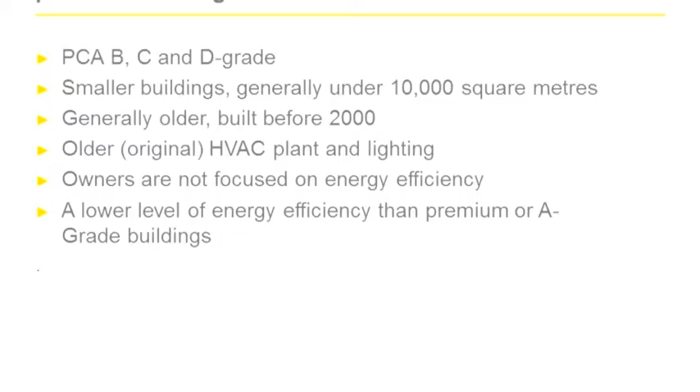So what did we find? We found that they were generally smaller in scale, older, often built before the year 2000, with older equipment forming part of their building fabric - older HVAC systems etc. - with limited capital spending to improve those over time.

We typically found tenants were less engaged in energy efficiency in those buildings. These small to medium-sized organisations' main imperative was renting a space in a good location close to where they carried out their business and that was cost effective. They weren't driven by the same key directives as we saw from the premium market, which was about demonstrating the positive characteristics you get from a higher star rated building.

But is it significant? This graph generally indicates, I think, that it is. Around 70% of the market in Australia is termed mid-tier, so the B through D grade properties. And when you have a marketplace where buildings contribute 23% of the greenhouse gas emissions of a country, 19% of which are coming from the commercial sector, that actually generates a reasonable opportunity for governments to intervene, and for people such as the GBCA and their partners here in New Zealand to see that as an opportunity to generate significant market change and efficiencies.

Clearly, as I said though, the greenhouse gas profile here is significantly different based on the electricity consumption market, but nonetheless important.

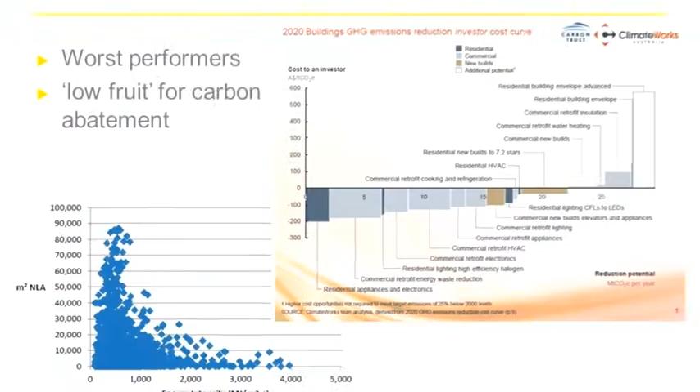So what is that opportunity, and is that real in relation to mid-tier? You might expect that the smaller end of the market are therefore smaller users of electricity - that isn't actually what we find. When you look at this graph on the left-hand side, as you go up the net lettable area space, smaller spaces tend to have higher energy intensity. That is to say, the market that isn't currently being penetrated by the NABERS rating schemes, by energy efficiency opportunities, or the Green Star rating tools tends to be the worst performer.

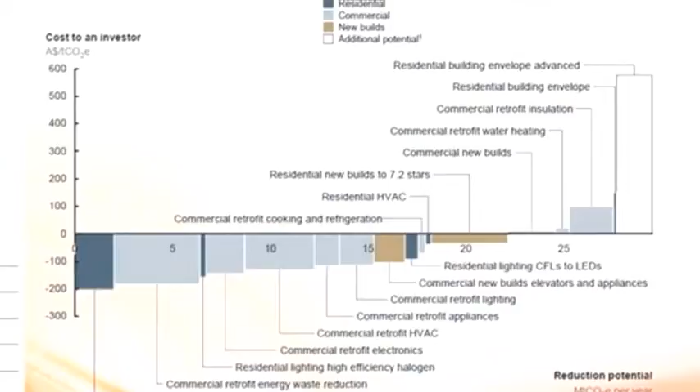And we know this is a classic climate change cost curve. We know that at the far left-hand side of the cost curve, delivering more in terms of carbon abatement actually costs back to the people who make those investments less than their initial cost - energy efficiency rates pretty highly, long before you get to the side of the curve where it actually costs you money to abate greenhouse gas emissions. So we've got two things: a marketplace which is ripe for investment, and a large opportunity cost of not undertaking that work.

So who are those owners of the mid-tier space? Well, we found that they were principally corporates, private owners, family - sometimes second and third generation family owners - foreign owners, corporations, strata titled as we have in Australia, and a smaller percentage of government owners. Around 20% of government leases are in the mid-tier space.

When we reached out to those stakeholders to talk to them, we identified that they were focused on financial returns, tenant retention, and keeping the buildings operating. Energy efficiency was generally lower down their agenda and their understanding of what that means, and they didn't have engagement with their tenancies in relation to that.

So what were the barriers? Some of the clear barriers, shared not just by the mid-tier market but the premium market as well, was access to capital. We know there is a landlord-tenant divide in accessing capital, which derives a benefit principally for the people who don't pay that money - the landlord pays, the tenant gets the benefit. If those tenants aren't looking at energy efficiency and are primarily trying to keep their costs down and be located near their place of work, then they're not willing to see a premium, which makes it difficult to access that capital.

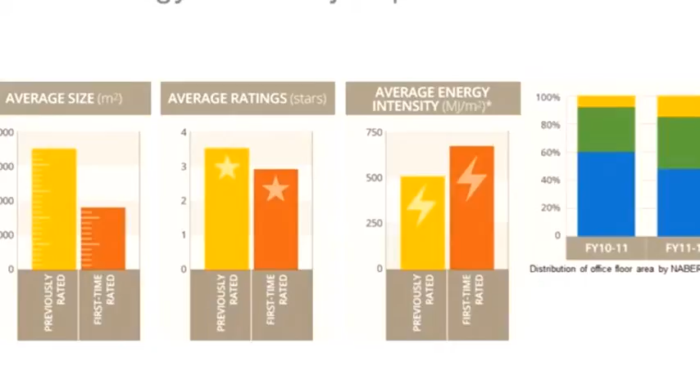The little graphs on the left-hand side show the total size of market - a significant increase in market size between the first time you rated and the second time, but also an increase in star rating. On average, there was just over a half-star rating increase from the first time those buildings were rated to the second time they had to be rated.

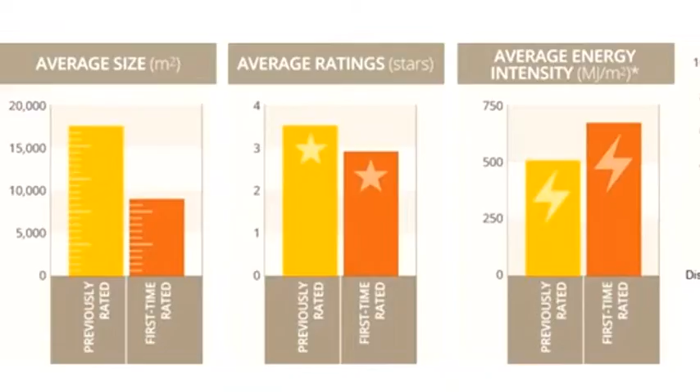So energy efficiency improvements were being put in place between those first rating and second rating requirements. And as you might expect, between those first time rated buildings and the second or third time that they're rated, there were significant reductions in energy utilization per square meter.

Now that's interesting, right? In the concept that NABERS is only a disclosure requirement, it only actually requires those buildings to put a star rating on them to say this is our energy performance. It doesn't actually require them to make any investment whatsoever.

But the implications and impact of having that disclosure requirement was, for the premium grade market, that it became a competitive differentiator. Tenants became much more engaged in what that meant. There started to be communication between landlords and tenants in terms of star ratings, what it meant, productivity, wellness. People started to pay a premium and seek out higher performing buildings.

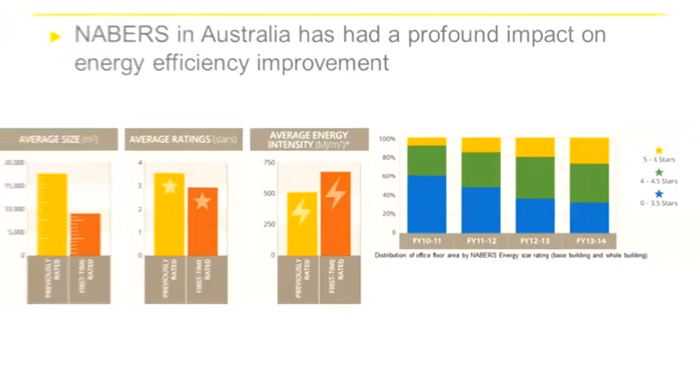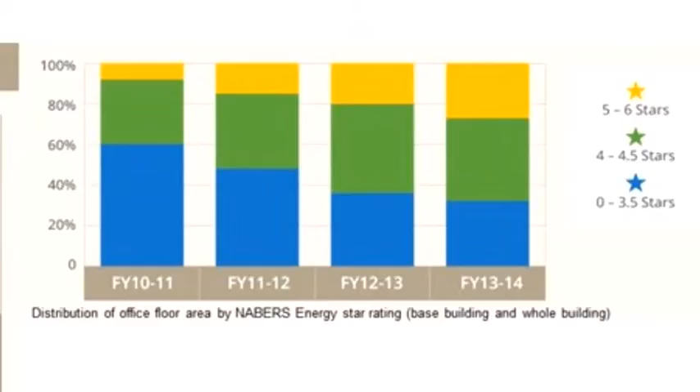And we've seen a general move in the population for that premium and A grade market, and you can see that over here. This is the total percentage in terms of those entire rated populations over the years. You can see that there's now a significant proportion that are between 5 and 6 star, whereas 3 years prior, for the data that's available, that was much smaller. So an overall improvement in relation to energy efficiency in that marketplace.

So we clearly identified there was a business case. The next stage was actually for the GBCA through its Green Cities seminar program, which is coming up in a few weeks' time. Last year, they took this information and analysis to a group of 50 stakeholders from the property industry and said, so what do we do? What's the pathway for success?

The first was that there was still a lack of information and knowledge in this space, and so further research needed to be done to try and provide a robust evidence base, not just in relation to the barriers, but also the opportunity that could be achieved for this to be addressed more widely by government and incentivized.

They wanted to build a compelling and quantified business case for energy efficiency upgrade, really starting to communicate with those mid-tier office owners why they would undertake this, really trying to demonstrate why they would want to undertake the energy efficiency upgrades in the first place.

Creating that awareness, of course, knowledge and behavioral change, and realizing that that needs to be a shift, not only in the people that they started to communicate with, because they are a different population of people to communicate with, but also because they are people who have not been subject to the same environment around sustainability practicalities.